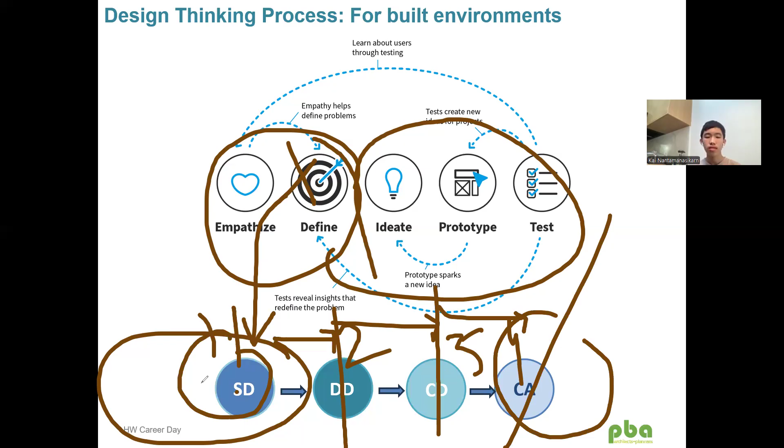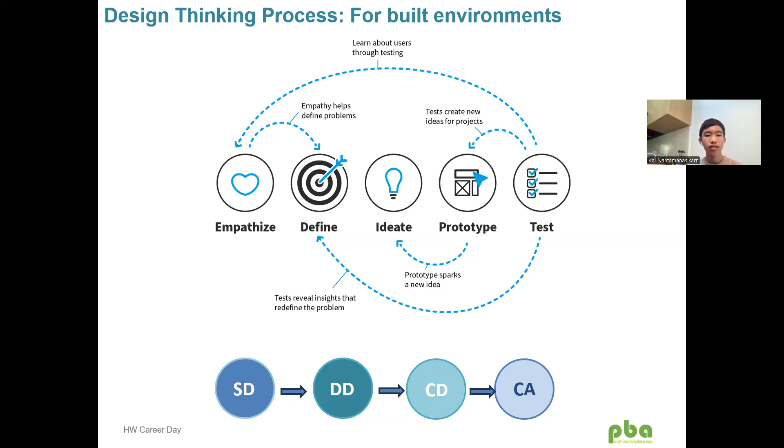Does that process explain itself before I go into a case study? Yeah, I think so. So you get ideas and test them until you and the people like something. Exactly—you and the users like it, whether it's a school, a shop, a hair salon, your home, whatever it might be. That's why we call it an iterative process.

So you go to Harvard Westlake, a beautiful school with two campuses, lower and upper. We can look at multiple case studies here for how you'd use design thinking as a process. I'll run through this—there's a case study for designing a school, and one showing how I built a duplex, for two families, one on top of the other. Which do you prefer—a duplex, smaller in scale, like one apartment over another, or a school? Maybe the duplex. Okay, let's go to the duplex. Absolutely.

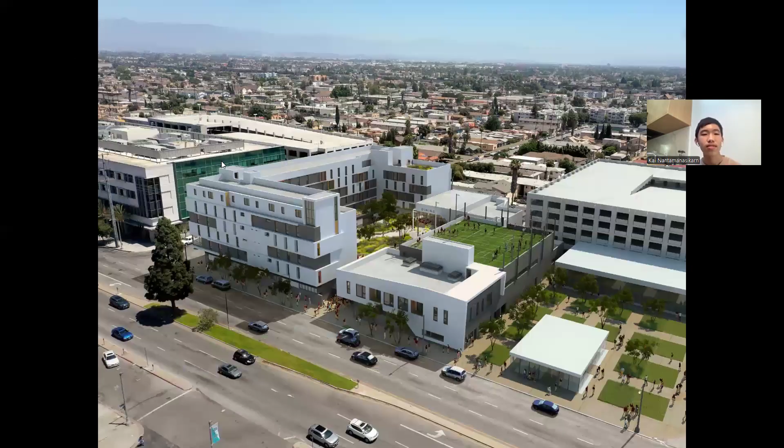Yeah, if we have time, maybe we can go to the school after.

Absolutely. Okay, so I got a call from a client. This is a physical project, it's going to get built soon, it's already permitted. It's a site in Santa Monica, sort of a regular size lot. Most properties are about 5,000 square feet; this is about 150 feet by 50 feet, closer to 7,500. It's on a corner site in the city of Santa Monica, and it already has an existing building with four apartments in it.

There were three brothers. They came together and said, well, there's space at the back, and the city is allowing us to build accessory dwelling units. What if we built two ADUs, which the city allows, here at the back? How would we do it?

So they ended up selecting me as the architect. They basically said, okay, Pooja, what can we build there? So I did some work and looked at what the ADU laws were that the city has put together, and the state has put together.

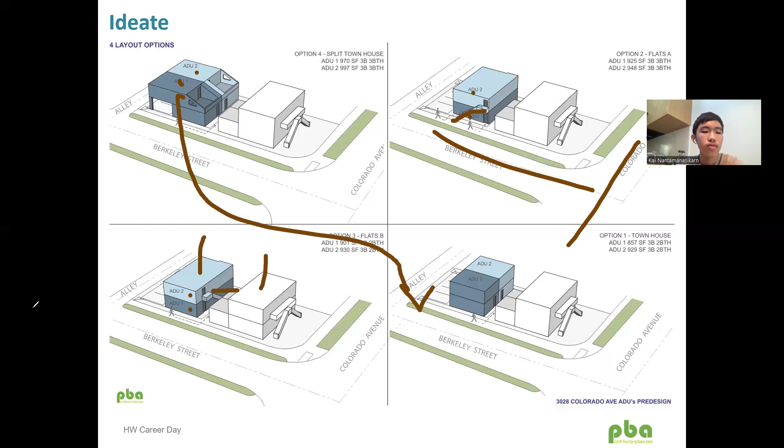The client ended up saying they really liked this option. I asked why, and presented pros and cons. The benefit is that you come into this apartment and it feels like you have your own entrance, and you're able to use the courtyard space between this building and this building, with a separate entrance that takes you up and inside.

So that was my first step of the process, understanding the rules and the client's requirements. Their goal was two apartments, three bedroom, two baths, to be able to put it on rent in the most efficient way possible, but also in a way that has privacy and feels like each one has different characteristics, while being as efficient as possible.

So we created sketches and used three-dimensional software. This is done in SketchUp, and then we showed them this as well as plan layouts of how the three-bedroom, two-bath would work. For example, you see it started off with a sketch like this, and it took multiple sketches to figure out what that would look like. And then, what does the plan look like?

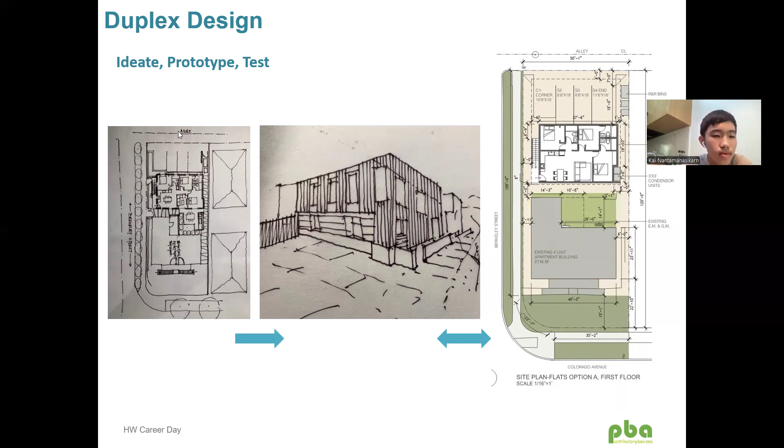The ideas come from inside you as to how, and you try and test them to see which ones fit the bill. So it's an iterative process, and we had four different ways of doing it. The client ultimately chose that option.

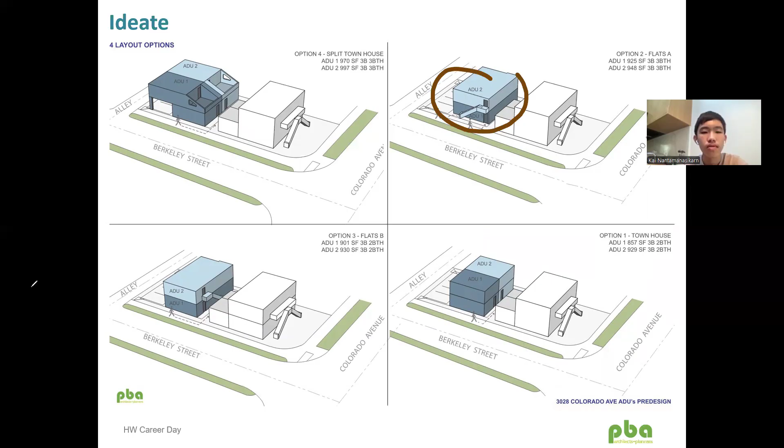So then we went back into figuring out how that starts to look from a three-dimensional perspective, both on the inside and the outside. We decided that because it's on the street, we wanted to give a little bit of privacy to the folks entering into these apartments.

So from here you have a little gate, you can go in and enter, and it feels like it's your own house even though it's an apartment. Similarly, you can enter in from here, go behind the stair, and once you're past this screen - a vertical trellis, as we call it - and climb the stairs, you feel like these are your own stairs, even though they're exterior to the building.

And then you can enter in. This one has its own balcony - you can see the balcony facing the courtyard, which is between the two buildings.

How to best organize the space between the two buildings was equally important to us, so we're creating a nice shared space for both the existing units and the new units coming in, so people can come together as a community, even though it's shared living.

In the existing building, there are four small one-bedroom, one-bath units. It's tight, but they're sort of micro units, if you will. Here's one way of doing it, here's another way, and here's another way - although this way is similar to that one, it's just a color difference.

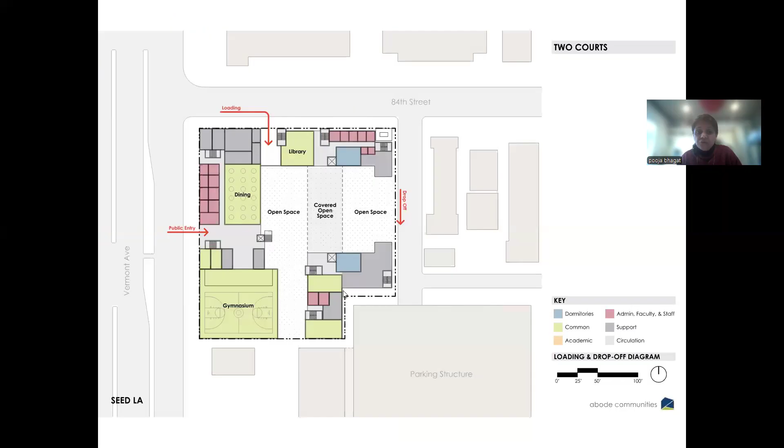Your drawings that you produce are done in such a way that the contractor can estimate quantities and can understand what is what, how far apart it is, how it's all made of. So you produce drawings in two-dimensional and three-dimensional format, plan format, section and elevation format, and not just views, so that the contractor can then use multiple subcontractors who specialize.

Each subcontractor specializes in something different. So if you're building in wood, you send it to the framer. Once the framer finishes, you get another subcontractor who applies drywall. Then you have the tiler, who will tile with a moisture-resistant barrier in bathrooms, and so on and so forth. And then you're answering questions during construction for the contractor once he starts construction as well.

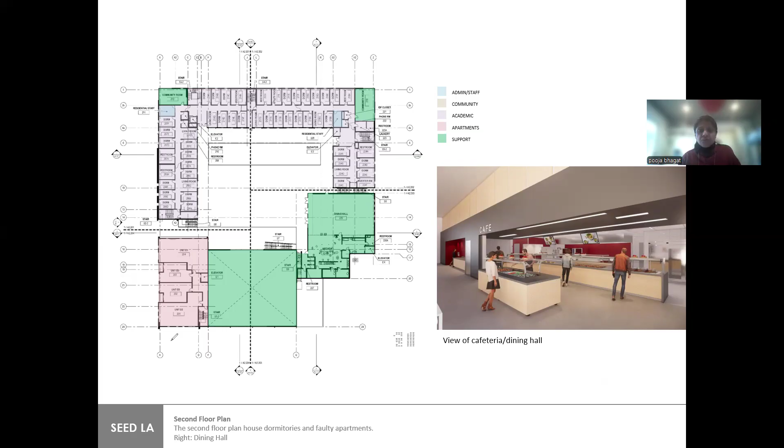So that, in short, was what is architecture. And there was a lot of words there, and I was wondering if these images did any justice to all of that stuff that I said, Guy.

Yeah, I think it's interesting how there's so many things you have to think of and how you can make it fit with what the people want. And I thought it was interesting how, like you said, the trellis provides privacy, but it also gives the sense of the person being in their home, even though it's technically outside. I think those aspects of designing things, that's interesting, how much thought goes into it.

Yeah, absolutely. And that's where there's form follows function. If you understand that concept, then there's form follows purpose. And then each one of these also results in how you feel psychologically in a space. Colors evoke emotions, materials coming together evoke emotions. So there's a psychology of space as well.

And how do you make something that is, you know, there's just two apartments here, right? And they're for rent. It's not high-end design. It's not somewhere up in Bel Air or in a very rich area. This is sort of on the flats and on the ground. You want to make sure that you're making extraordinary spaces out of just ordinary materials, if you will.

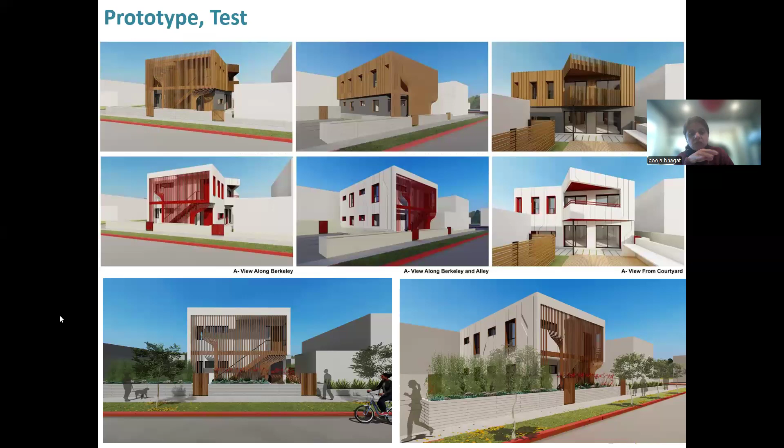Or for you. And you can explore your path to achieve your goals. You do case studies just like you're doing right now, both attending and listening to those in the field to understand how they ended up where they are. Then you're doing this exploration process and saying, well, what if I became an architect? What does that mean? So you're exploring that right now. You take courses, you volunteer, or you do internships, you take summer programs. And then you reflect, gather feedback, and adjust your path.

And so you're using that same idea of design thinking towards multiple things. You can use that towards solving any problem, if you will. It's a question of how you interpret the words, or the process, towards any solution. And we use this for any building type for that matter, or for any problem solving.

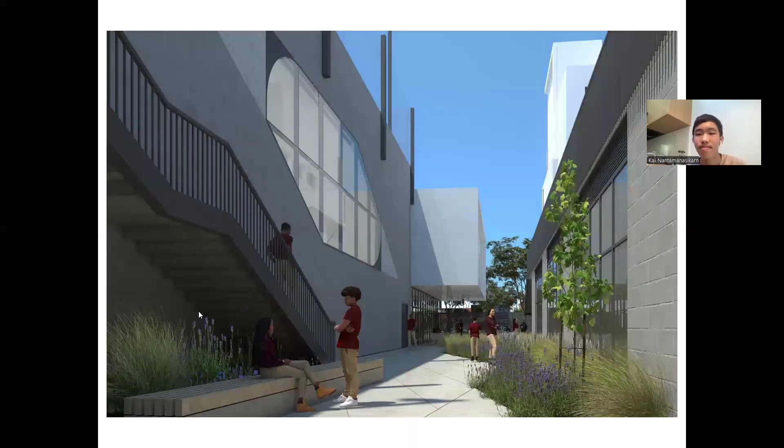Do you foresee that the architectural design will shift after the recent fires and stuff? Do you think codes will change?

Okay, I'm sorry if you covered that already in the first half. No, this is a very relevant question. Kai is a freshman in college, you're four years his senior, so you're both bringing in different aspects to this conversation. Very relevant question, Eric, and very timely as well.

So how do we design resiliently to protect from fire, earthquakes, cyclones and stuff like that? Why did the Eaton fires and Palisades fire create that much destruction? How can we prevent that from happening in the future? Will the building codes change? How do we really design so that if the Palisades, the Eaton, and the Altadena community were to get rebuilt again, it never happens again, even with those kind of awful winds?

There's multiple ways to answer this question. There's an ecological standpoint, a macro standpoint as well. So let's talk about the macro standpoint, the ecology of a place and the larger topography of a place, and how that influences the good design and planning that influences how the fire can be stopped. So that's one aspect of it.

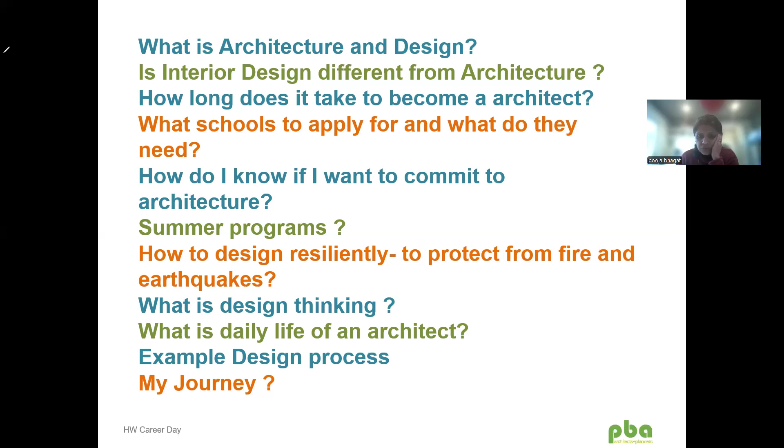I'm part of a nonprofit organization called Architecture for Communities Los Angeles. We're a sister organization of the American Institute of Architects, an industry architecture organization. What we've done is come together to create a wildfire task force. Our goal is to be at the table with the mayor of Los Angeles, Karen Bass. She has appointed a chief rebuilding officer, so our goal is to meet with him and be at the table in terms of providing strategic thinking and knowledge, so we're able to design and plan for the logistics of building appropriately for the different conditions.

There are individual homes, apartments, houses, schools, businesses, hospitals. There is so much that is lost, and then there's infrastructure work. I think it's going to reveal itself. I hope the process is not going to be completely organic and completely chaotic. If it's organized chaos, at least we'll all be much more thankful. That answer will come from both public and private strategy, planning, and organizational thinking coming together. It'll reveal itself. I don't have an answer right now. I think we're all figuring it out.

What about from a zoning standpoint? Do you think anything will change if families in a certain area want to sell their properties and leave? Do you think the city is considering upzoning, having more apartment buildings to solve the housing shortage that way? Or do you think it's mostly going to stay single family, at least for the Palisades?

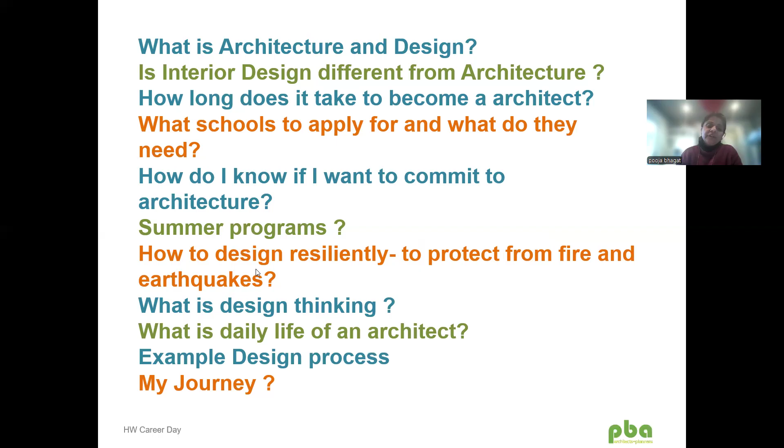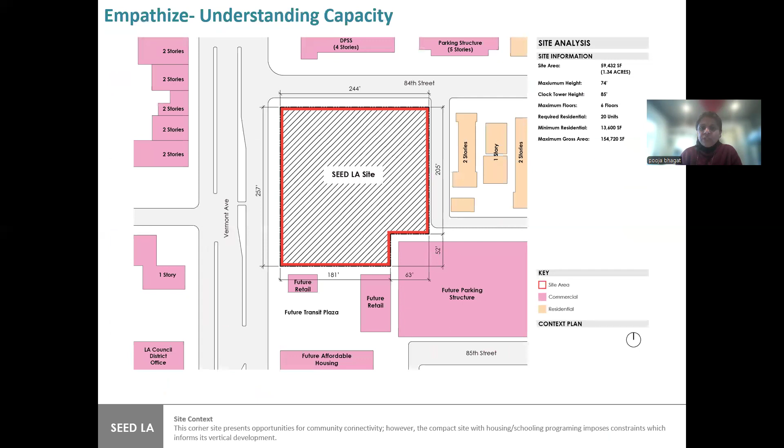Let's go back and take a look and see if I had any sketches of plans. We definitely collect all of the data, and you're seeing a lot of finished drawings and products. So it starts from first gathering information and facts, prioritizing needs and wants, and then understanding and defining the goals we want to achieve in the finished product. Those goals and priorities, in the buckets of needs versus wants, help guide you through every process of the design. So that's what's happening in the back of my head.

What is the armature and the rules? I start with the ergonomics, not just what the building code says. So if I'm designing a room, if I'm designing a closet in that room, if I need a bed, a desk, or a grand piano in that room.

If I want a light table because, Kai, I need a large space for a cutting board and my paper, so I have a space to build all my models, just like you've been building them, then I'll design my room accordingly with more horizontal surfaces to work at, a place for my computer with my two screens, a place to sketch, a place to cut, a place to put my tools.